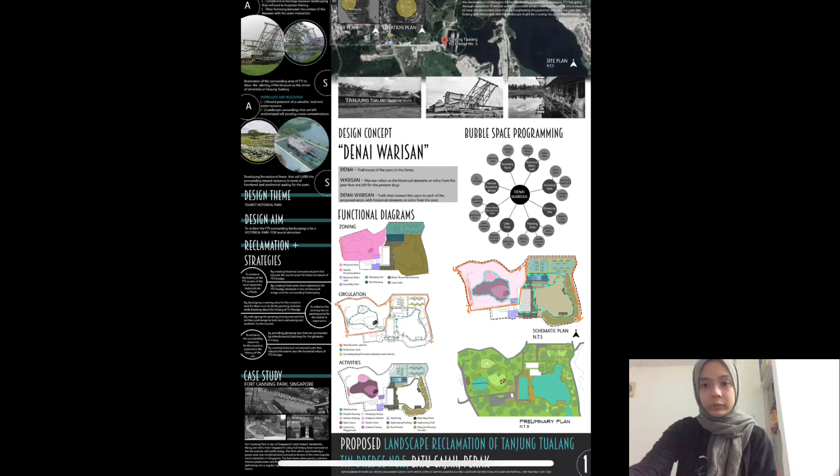We have been given a site located at Batu Gajah called Tanjung Tualang Tin Dredge number 5. This site is an important historical site that exhibits the history of the tin mining industry since the beginning in Malaysia. It has gone through more than 10 million worth of restoration project, to keep the tin dredge as a museum and keep the monument alive.

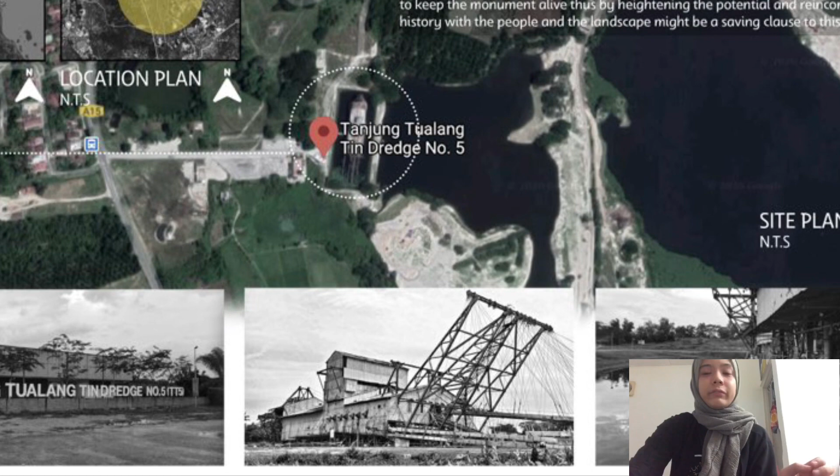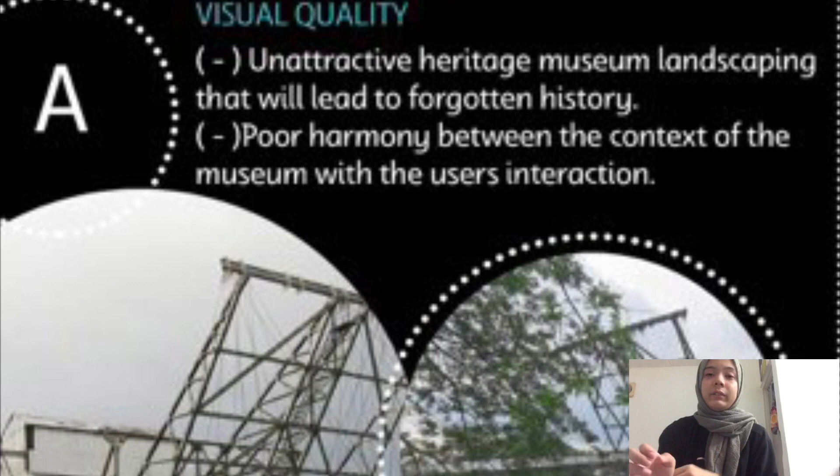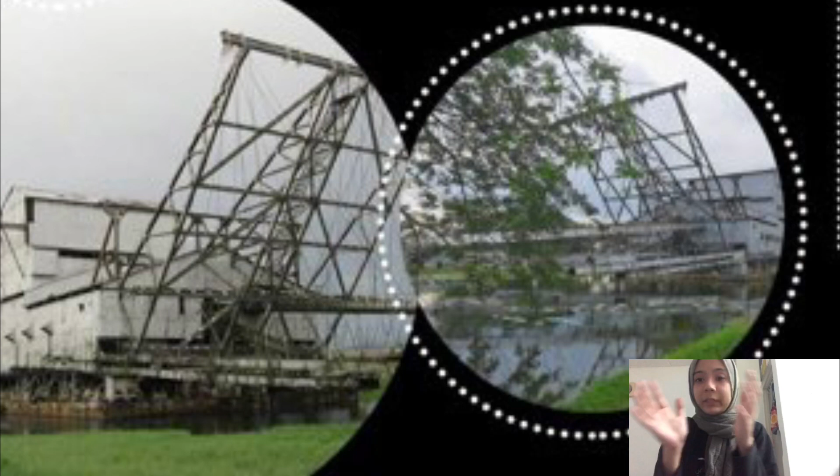After doing some mini analysis and synthesis for this site, we found out that the visual quality and architectural image of the site is quite low, because the unattractive heritage museum landscaping leads to forgotten history. At this site, only the dredge itself is attractive to users, but the landscaping is not really well developed, plus there is poor harmony between the context of the museum and the users' interaction.

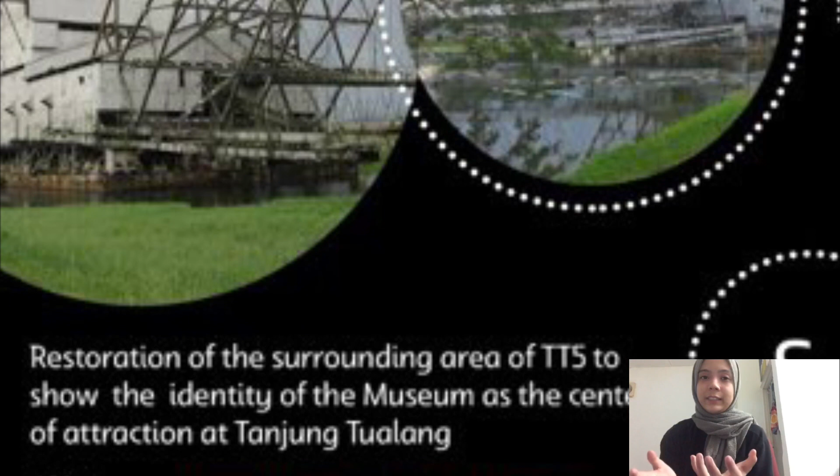So we came up with the synthesis where the restoration of the surrounding area of TT5 can show the identity of the museum as the center of attraction at Tanjung Tualang.

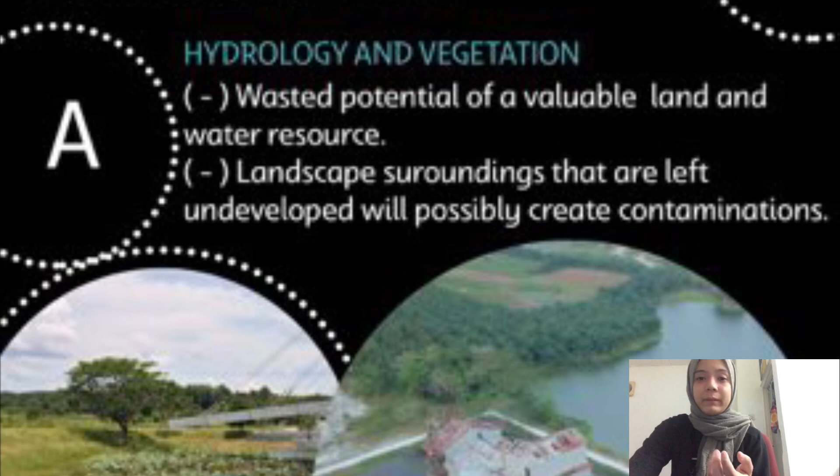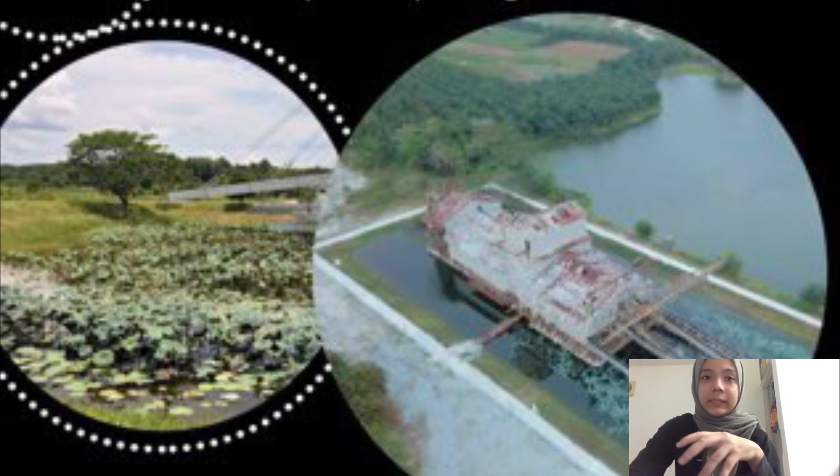Next is the hydrology and vegetation. We found the wasted potential of valuable land and water resources because they are not being developed properly, and the landscape surrounding that is left undeveloped will possibly create contamination in the future. So we came up with the synthesis where we wanted to develop recreational areas that fulfill the surrounding natural resources in terms of functional and aesthetical quality for the users.

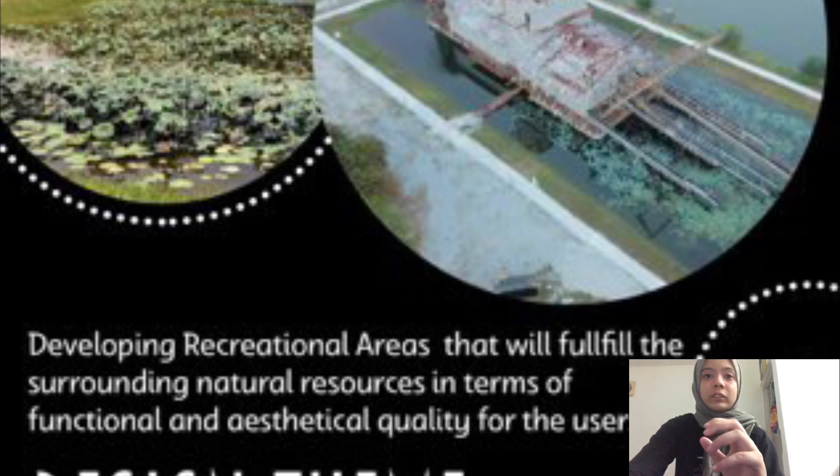So we came up with the design theme, which is Tourist Historical Park, where we want to reclaim the TT5 surrounding landscaping to be a historical park for tourist attraction.

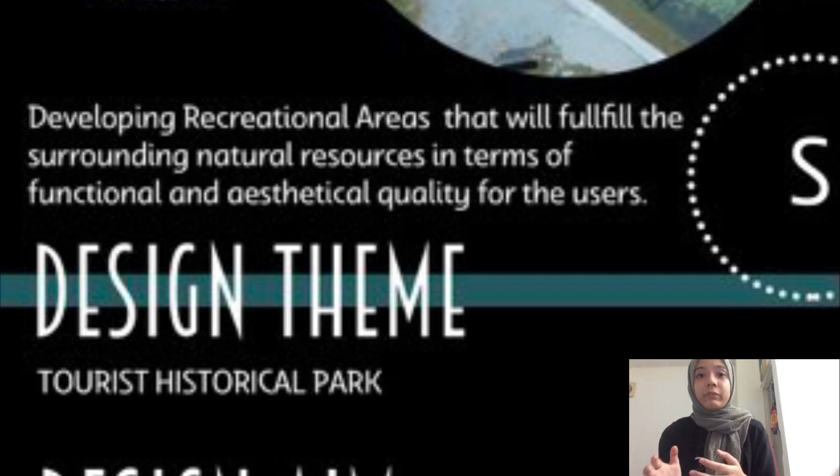Some of the reclamation strategies: because we want to preserve the history of TT5 as one of the most important historical sites in Perak, we would like to fulfill it by creating a historical recreational park that educates tourists about the historical values of the TT5 dredge, and also by creating a food center that implements the TT5 dredge elements such as sculpture and rustic hardscapes.

Secondly, we want to enhance the existing tourist panning area for the tourist experience, by developing a waiting area for tourists to wait for their turn to do the panning activities, and by redesigning the panning activity area and the architectural image to look more aesthetic for users.

Lastly, we want to enhance the surrounding resources for tourists to experience the history of the site, by providing glamping sites surrounded by ethnobotanical plantings, and by creating a historical recreational park that educates tourists about the historical values of the TT5 dredge, which has a playground and sculpture garden in the historical park.

We found a case study located at Fort Canning Park, Singapore, which is one of the most historic landmarks, because there are many war relics from Singapore's colourful history that have survived on the hill and are still visible until today.

My name is Muhammad Azim, and I will continue with the functional diagram. The first functional diagram is the zoning.

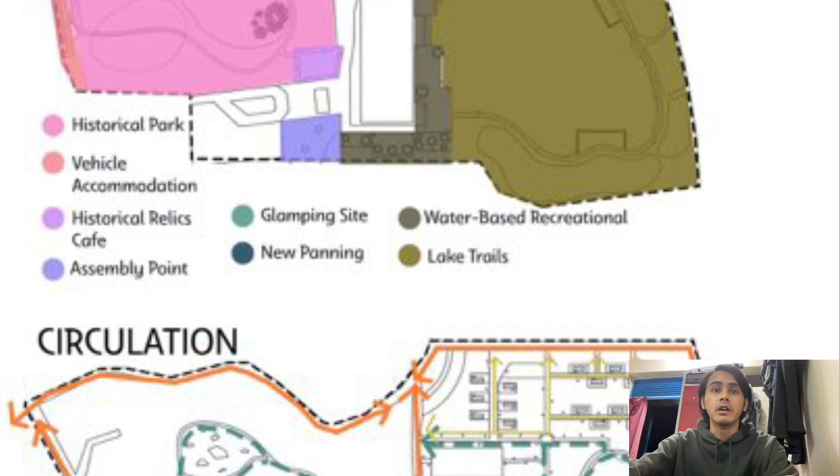We can see here that the historical park is pink in color, and the vehicle assembly point is in a different color. The second functional diagram is the circulation.

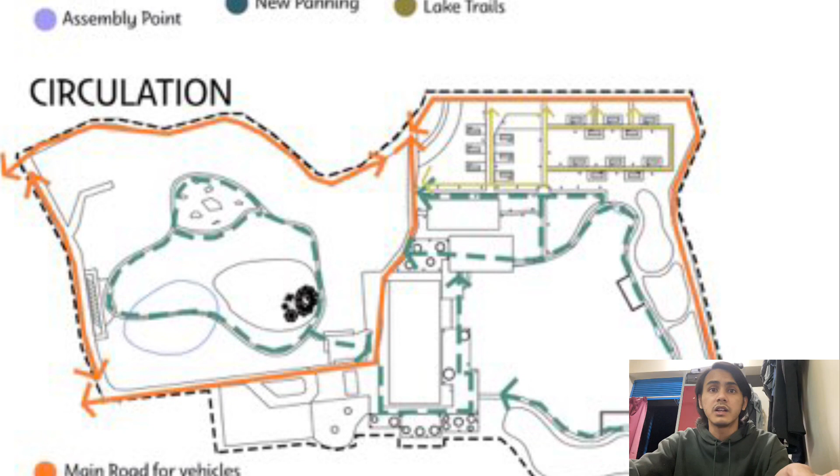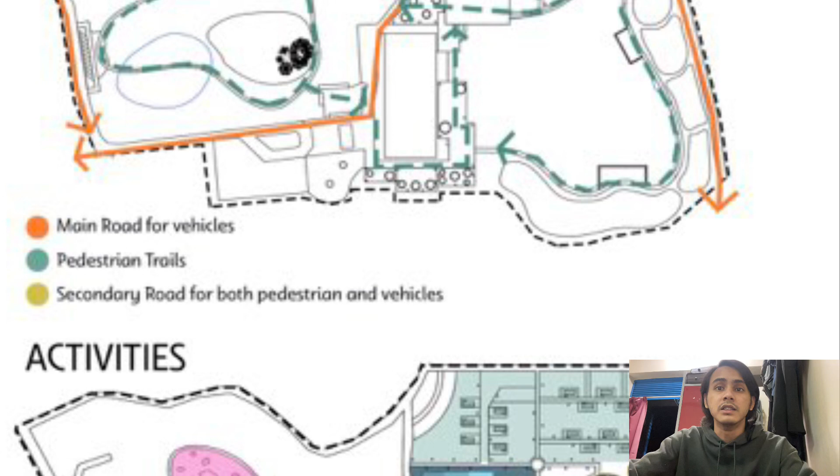We have the main road for vehicles, pedestrian trail, and secondary road for both pedestrian and vehicle. The third functional diagram is for the activities.

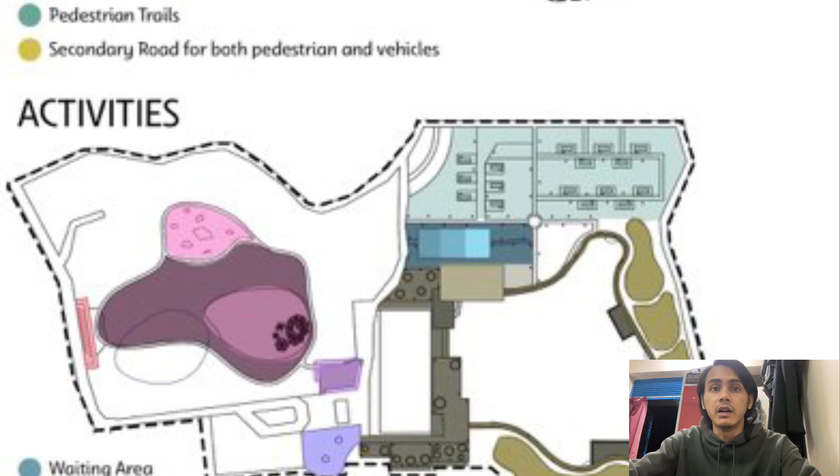For the activities we have waiting area, double panning, vehicle parking, open spaces, interactive, and others, etc. Moving on, we have our schematic plan, and our preliminary plan.

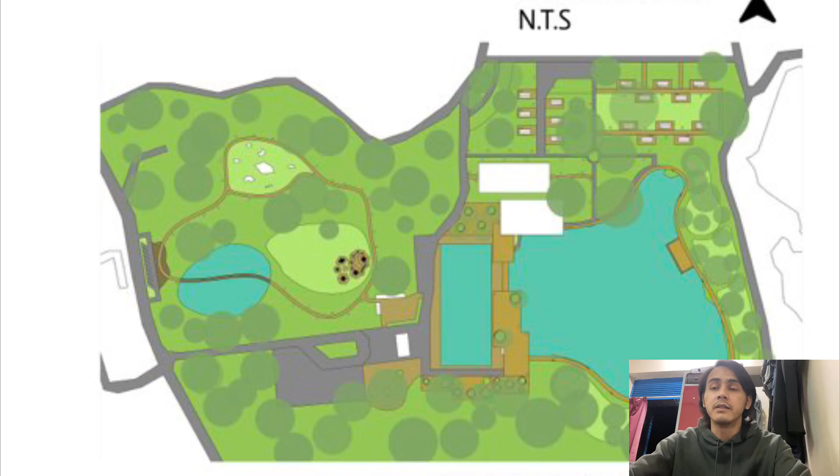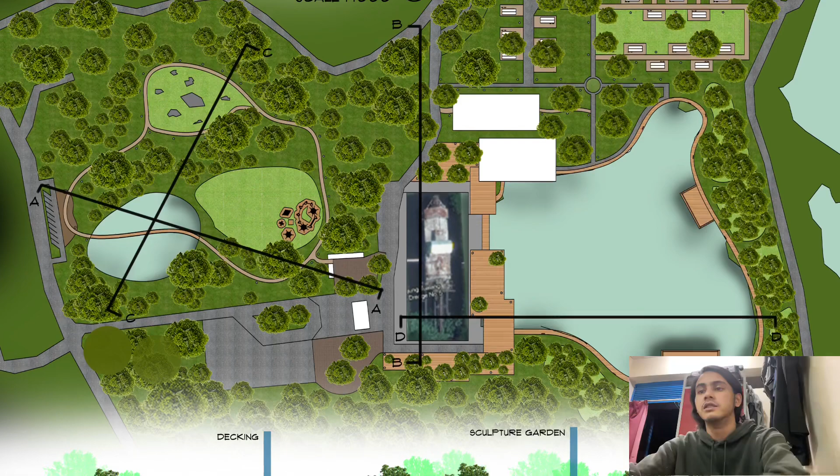Okay, moving on to the master plan. This is our master plan, in scale 1 to 1000. Under the master plan, there's a section AA, with the scale for the section at 1 to 500.

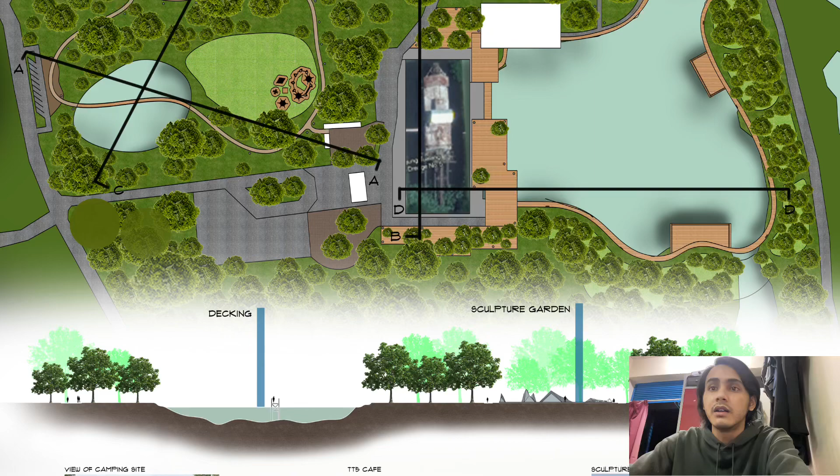In this section, we can see there is decking for visitors to cross around the pond in the sculpture garden, which tells the stories of the TT5. There are sketches for the sculpture garden under section AA.

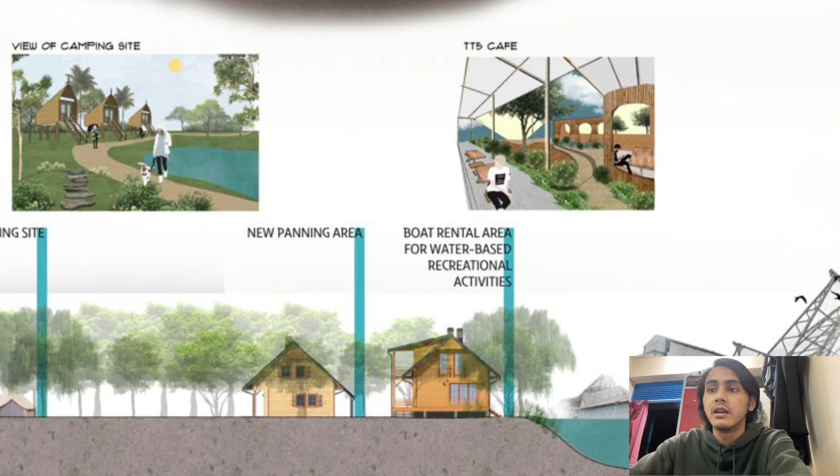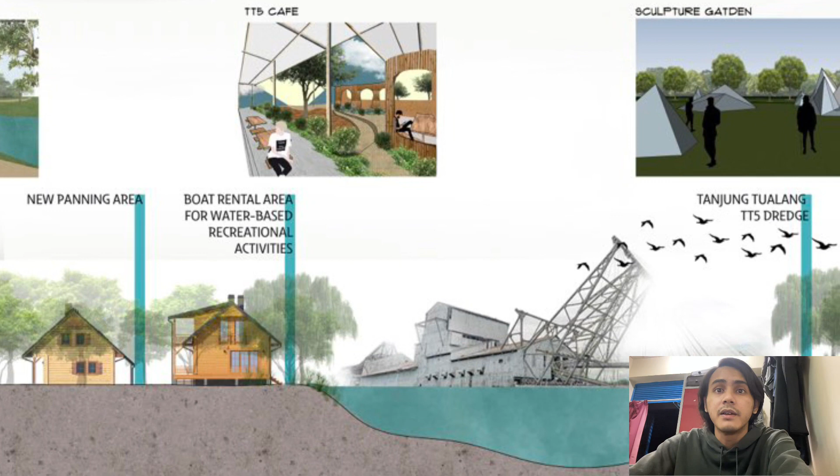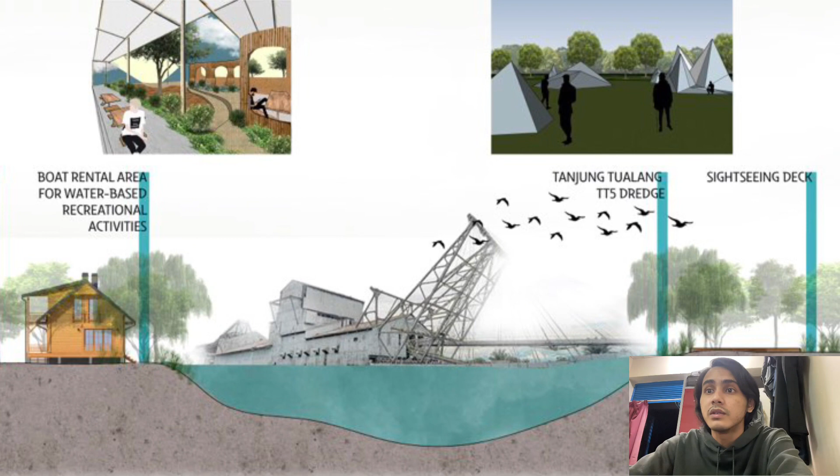For section BB, we can see there's a camping site, and above section BB we can see the sketches for the camping site. Next to the camping site there's a panning area, then to the right a boat rental area, and Tanjung Tualang TT5 for the sightseeing deck.

Moving on to section CC, we can see there's an entrance - the other entrance to the historical park - and open spaces for the visitors.

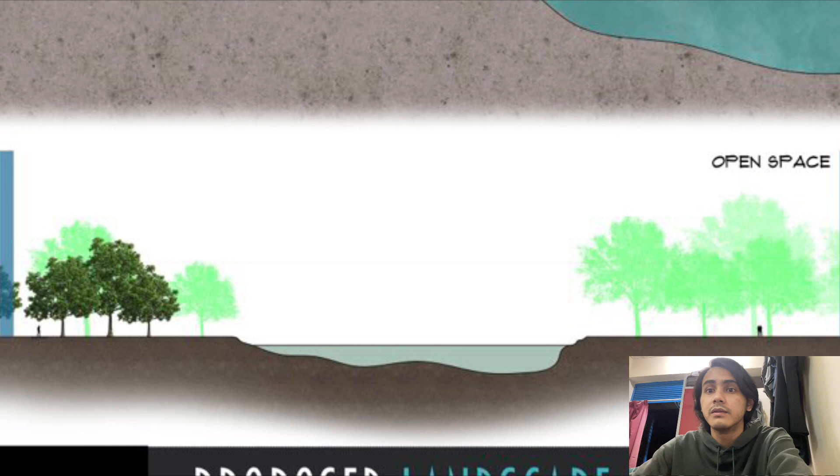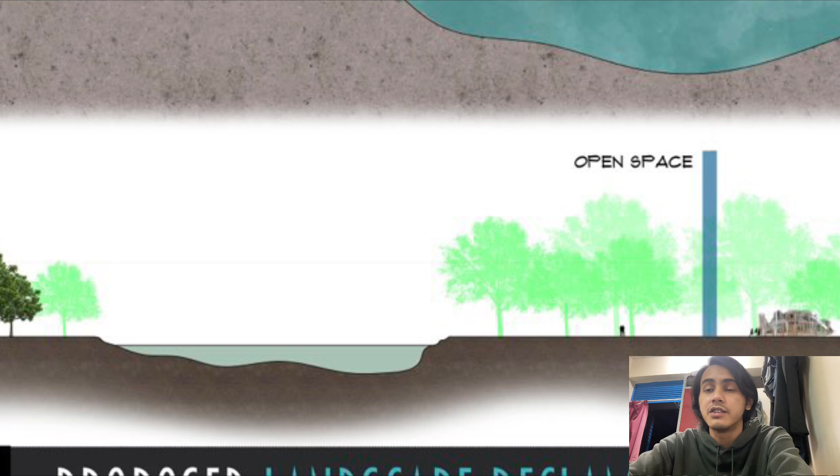In those open spaces there is a net playground for the children to enjoy, with the concept of tin dredge ships, and at the right side there's a TT5 cafe.

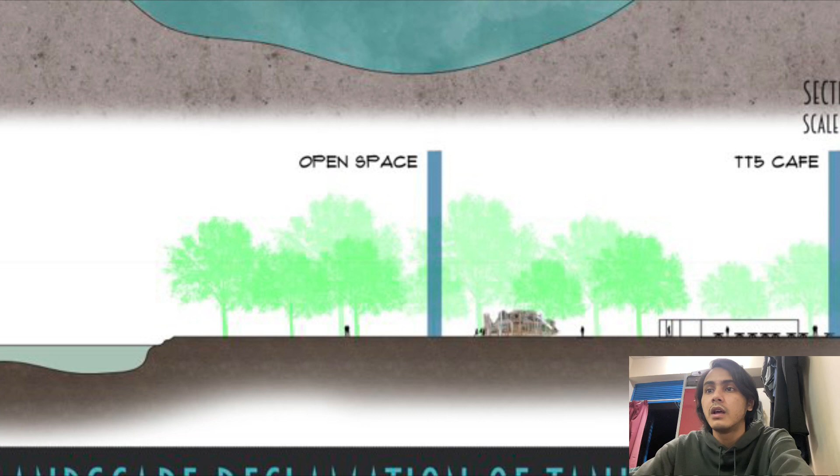This cafe, visitors can come from the historical park and then sit around and enjoy the view of TT5 while having some meals. I think that's all for the second board.

Moving to the third board.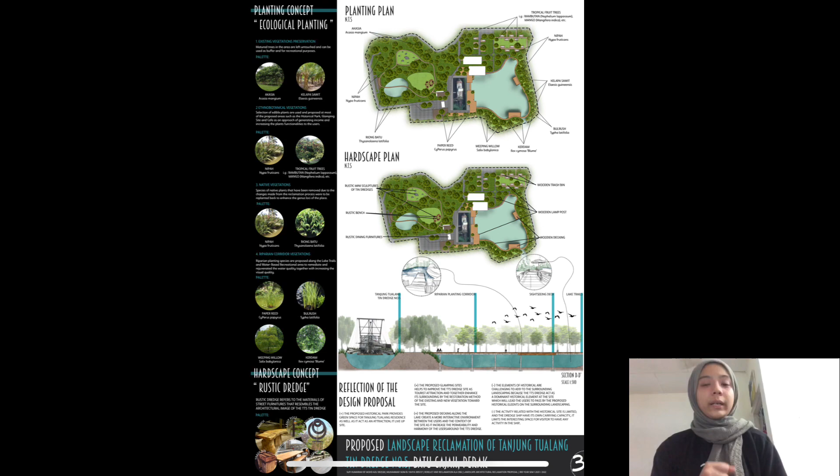The next one is the ethnobotanical vegetation, because we want to increase the functionalities to the users such as pokok nipah and the tropical fruit trees such as pokok rambutan and pokok mangga.

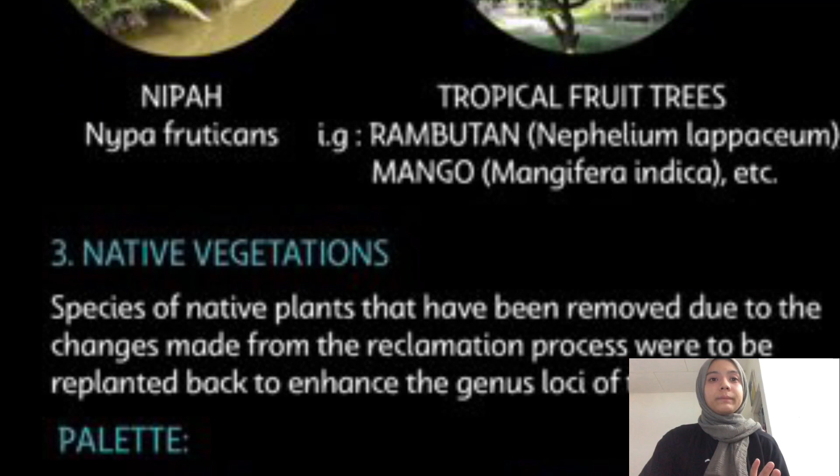The third one is the native vegetations, because we want to replant back to enhance the genius loci of the place, such as pokok nipah and also pokok riong batu.

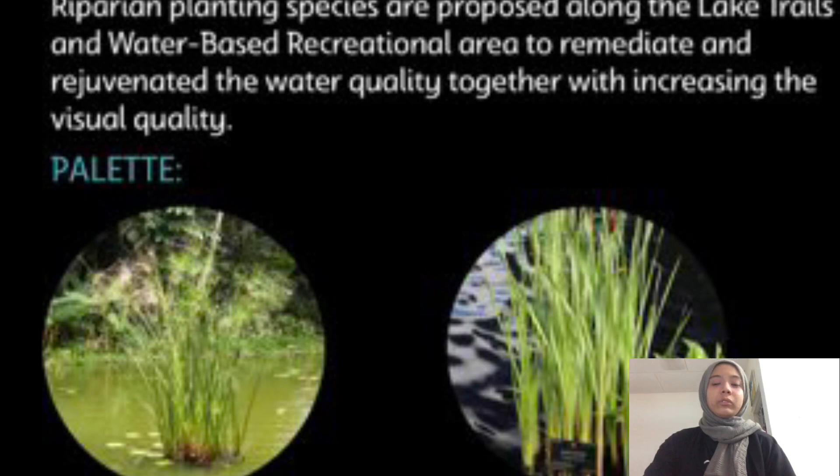And the last one is the riparian corridor vegetation, because we want to remediate and rejuvenate the water quality together with increasing the visual quality, such as paper reed, bulrush, weeping willow and pokok kerdam.

And then for the hardscape concept, we came up with the rustic dredge, because we want the street furnitures to resemble the tin dredge, Tanjung Tualang tin dredge number 5.

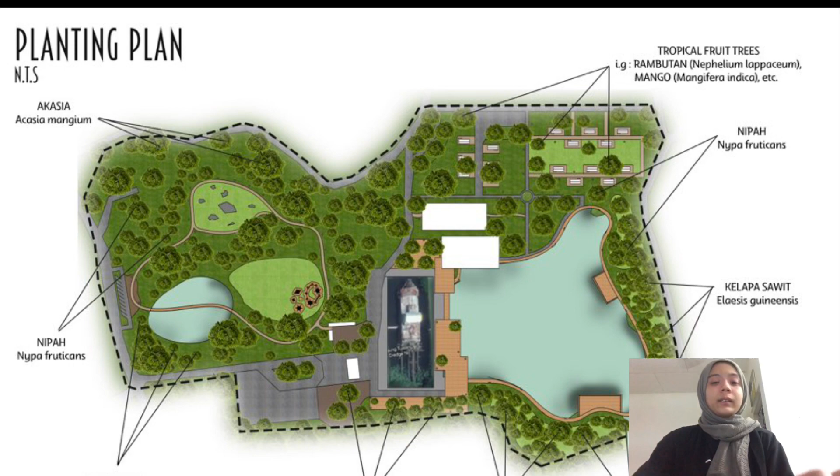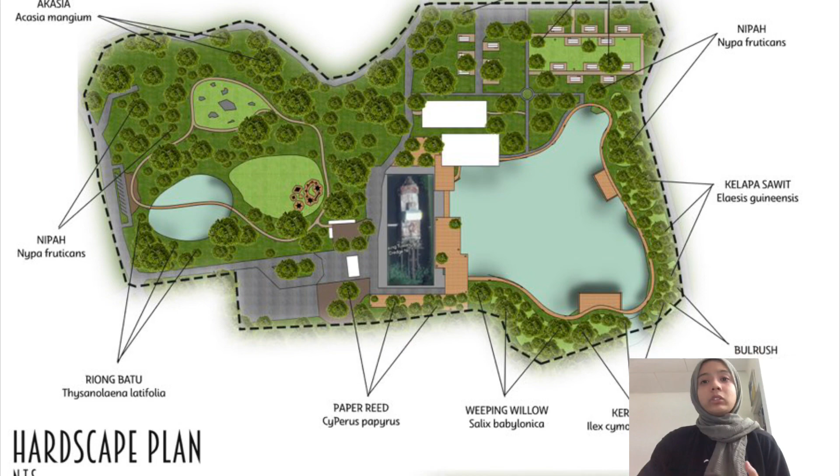So our planting plan just shows where we wanted to put each of the proposed plantings on our site, and same goes for the hardscape plan, where we wanted to put each of our street furnitures such as wooden trash bin, wooden lamppost, wooden decking, rustic dining furnitures, rustic bench and rustic mini sculptures of tin dredges.

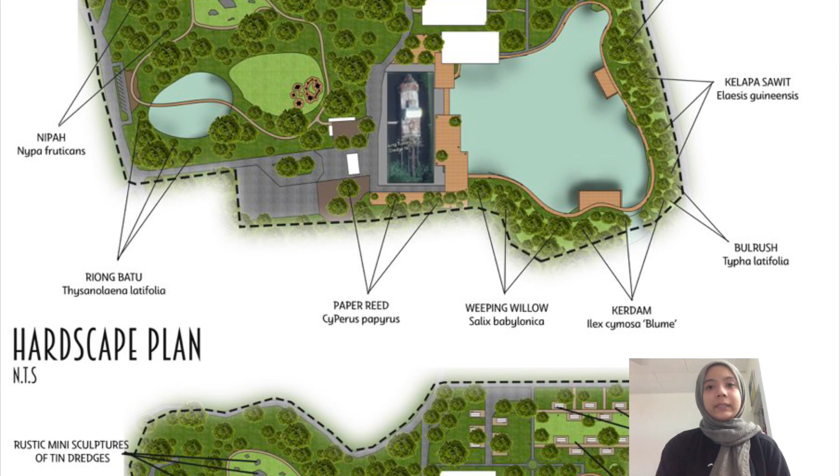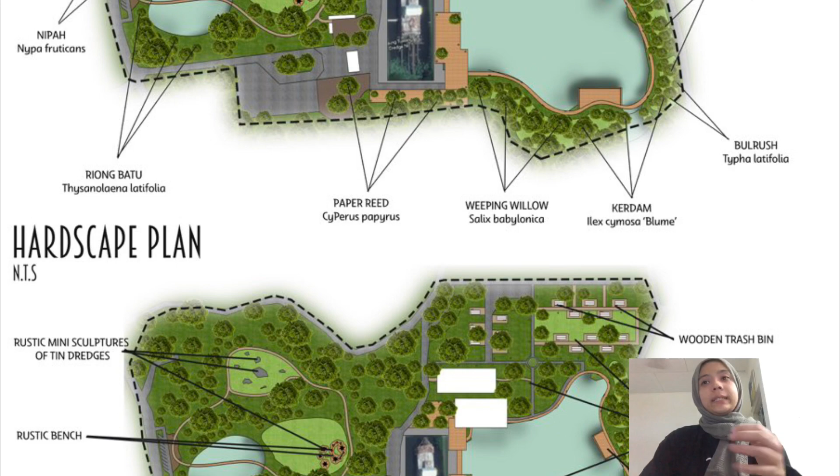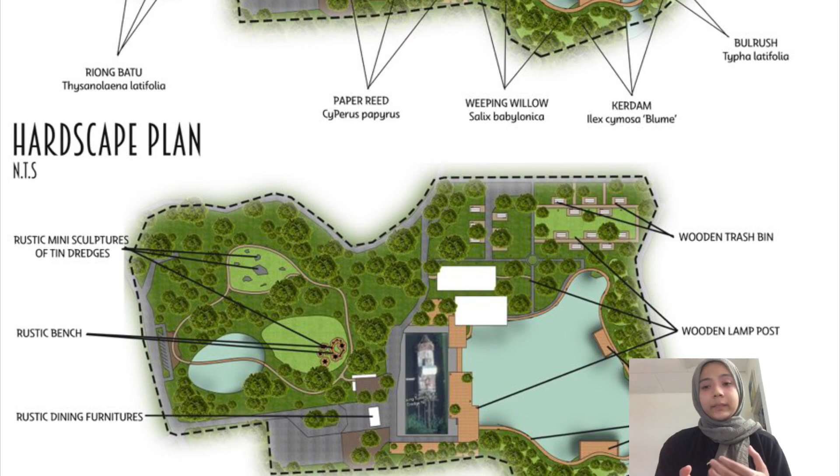And then lastly is the section where we wanted to show the lake trails, how the sightseeing deck will look like, and how the riparian planting corridor works together with the decking and water-based recreational activities, such as riding the boat along the lake.

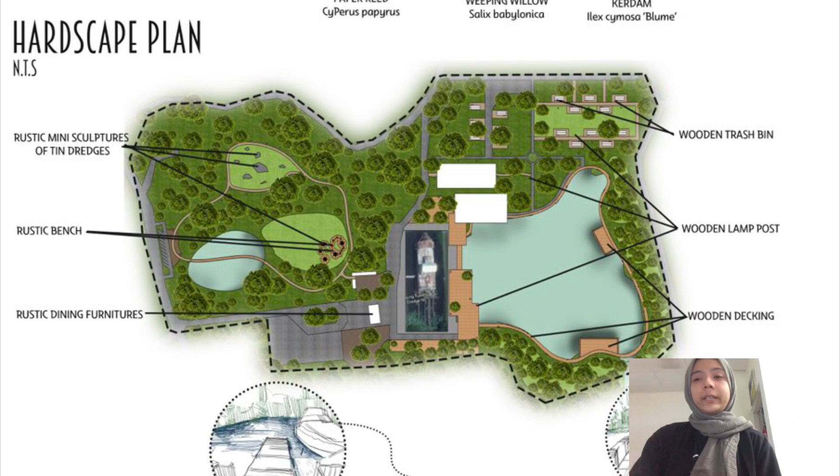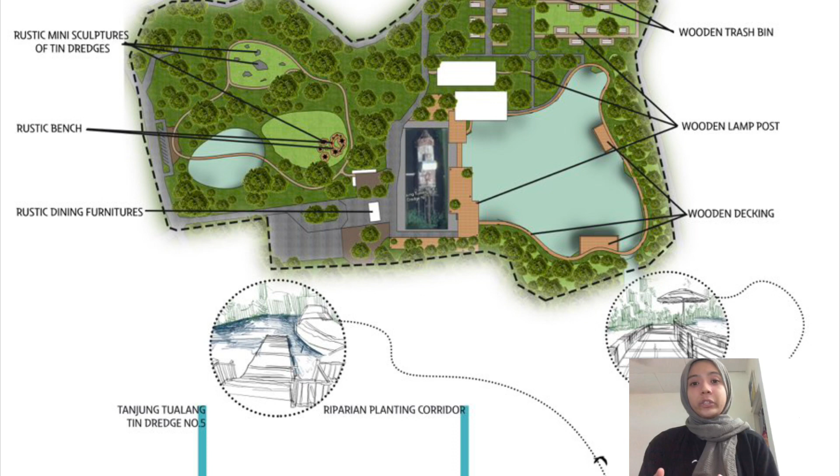And then lastly is the reflection of the design proposal. After reflecting and seeing the strength and limitation of our proposed design, we found that some of the strengths include the proposed historical park providing green space for the Tanjung Tualang residents.

And then the proposed glamping site helps to improve the TT5 dredge site as a tourist attraction and together enhance its surrounding by the restoration method.

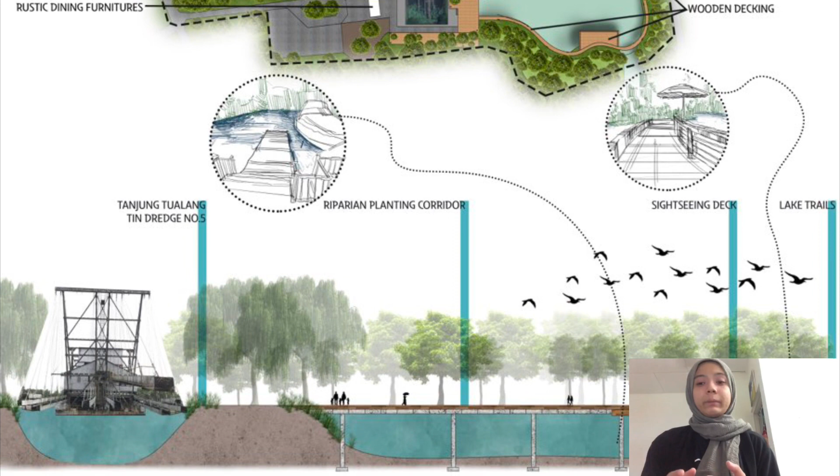And then the proposed decking along the lake also creates a more interactive environment between the users and the context of the site, as it increases the permeability and harmony of the users around the TT5 dredge.

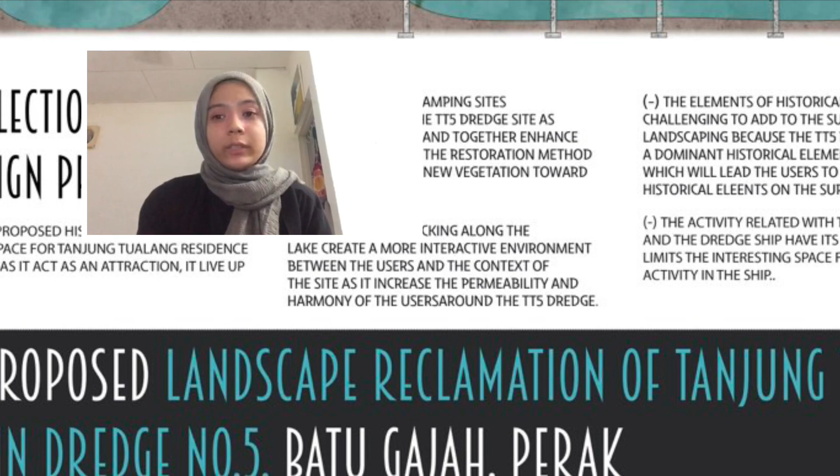However, some of the limitations are that the elements of history are challenging to add to the surrounding landscaping, because the TT5 dredge itself acts as the dominant historical element.

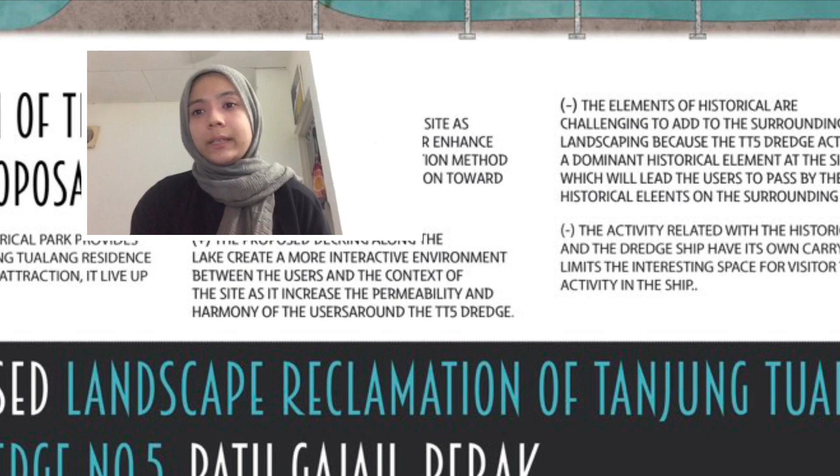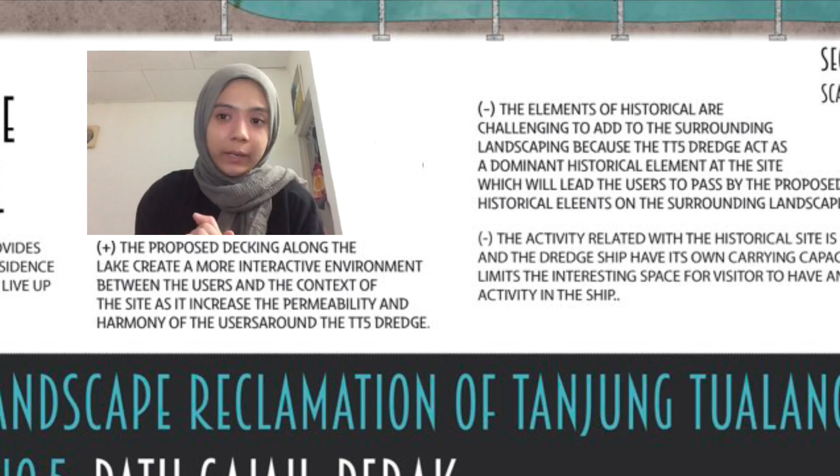And then the last limitation is that the activity related to the historical site is limited, and the dredge has its own carrying capacity, which limits the interesting space for visitors to have any activity in the ship. So that's all from me and Azim.